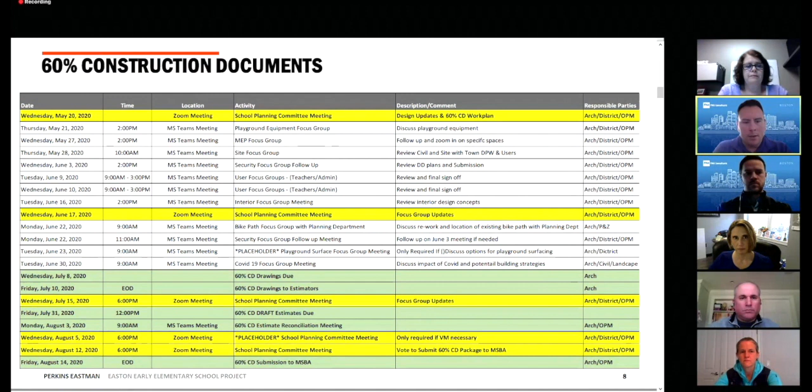So after DD, we move forward into the next design milestone, and that is 60% construction documents. Same as design development, we develop a work plan. We identify necessary focus groups where additional information is needed to support the design team and their subconsultants' development of the construction documents. At completion of 60% design, that again gets submitted to the MSBA.

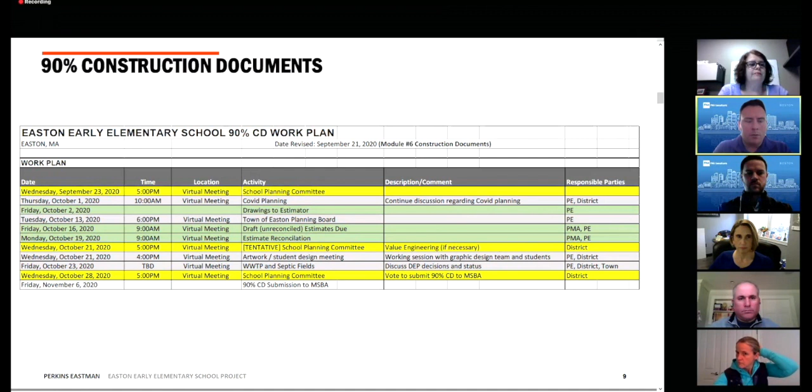The MSBA provides review comments, and then we take those review comments and we roll right into 90% construction documents. By this time, the nuts and the bolts of the building are really there, and we're just kind of fine-tuning some of the leftover design decisions that need to be made. We do submit again to the MSBA, and we perform another round of estimates and another round of value engineering on the 90% package.

This all happened last November, so that process through 90% took just about a year from the date of the local funding authorization. With the MSBA responses back on the 90%, we move forward and create the 100% bid documents, which are also submitted to the MSBA, but we do not get comments or feedback from them, as they serve at that time as the bid documents and bid package put out on the street to the subcontractors and general contractors.

Now, sorry, do you want me to go, Jane? Nope, go right ahead. All right, we're just going to do a quick design overview.

And with that, Dan Colley is going to highlight some of the sustainability features of the new building. We are targeting LEED Silver. Some of the highlights are our use of low emitting materials. We're chasing 5 categories: paints, insulation, composite woods, ceilings, and flooring, looking for EPDs, environmental product declarations, to support that these materials will be healthy and hopefully non-emitting or zero emission.

Our energy use reduction is at 36.8%, which is below the baseline of the average building, like an average school building, where performance is 36% better.

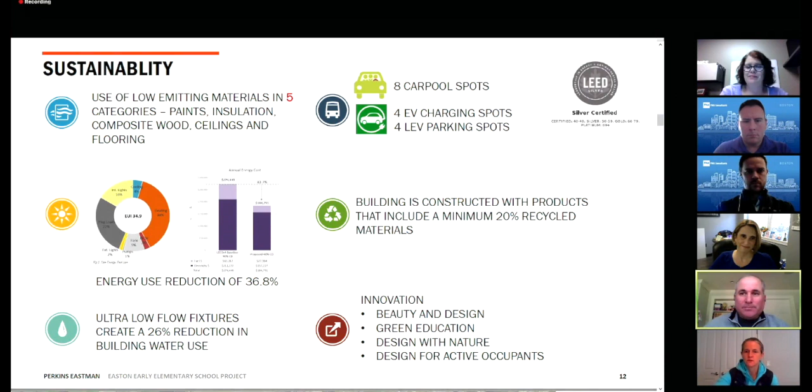So with that, I'd love to walk everyone through the site plan and give you some planning highlights about where the building will be on site, and look at some of the different components before we dive into the rendering. At the top of the screen we've got Columbus Ave, then it travels down Spooner and Lothrop toward the bottom of the page, and those are all allowing access points in or out of the campus.

You can see the existing middle school and RO on the left, and the high school is just off screen to the lower left. Mostly everyone knows the campus and is familiar with it, but in case you're not, what we are doing is connecting those 3 streets through the campus with the north-south connector road.

What that will allow us to do is mitigate some of the current traffic problems existing on the site. We heard a lot about how that currently works and how this project may be able to help and improve it, so this north-south connector becomes very important to the project.

What it does allow is access off of Columbus Ave from the north. You can travel south on that connector road, and the buses can come in from there or Spooner, and there's a bus loop just north of the building. The building is the big white outline towards the lower middle part of the screen.

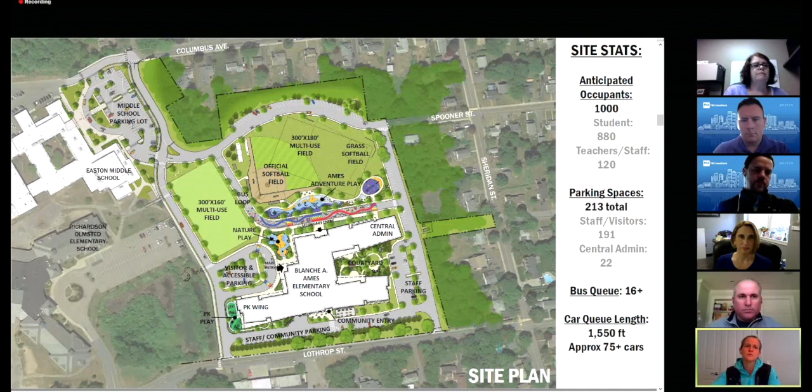The last feature on the site is the middle school parking lot upgrade that will happen as part of this project.

So we have been very fortunate to be able to afford within this project a redo of the middle school parking lot. Dawn mentioned that there's a connector road that runs out to Columbus Ave, and there are probably many people who will be listening who are familiar with how you come into the middle school off of Columbus Ave right now. Our traffic engineer felt that entry could be smoothed a little bit, and that's part of this redesign.

Also, there's a little bit of some space between the entrance to the existing middle school and the drop-off area, and a reconfiguration of that parking lot to allow individuals to access the new connector roads more easily. It actually increases the parking lot a little bit by about 3 spots, so it goes up to 86 parking spots versus the 83 that were in there previously. So it's a little bit more parking and a lot better circulation.

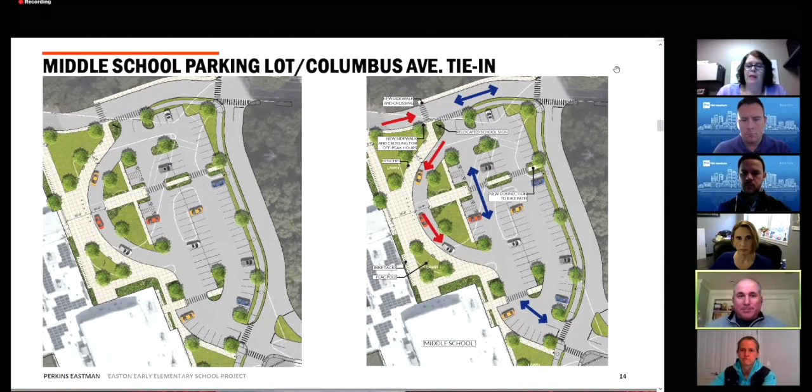Great. So with that, I'd like to walk you through some of the exterior renderings that have been done and just highlight some of the areas that I described on the site plan.

So this nature themed playground that I described, you can see here with some of the precedents and the site plan of it. There's a platform, a custom climber, and lots of wood steppers and a spinner, fully accessible and available to all students, whether it's at arrival or during recess. Plenty of fun things for the students to connect directly with nature.

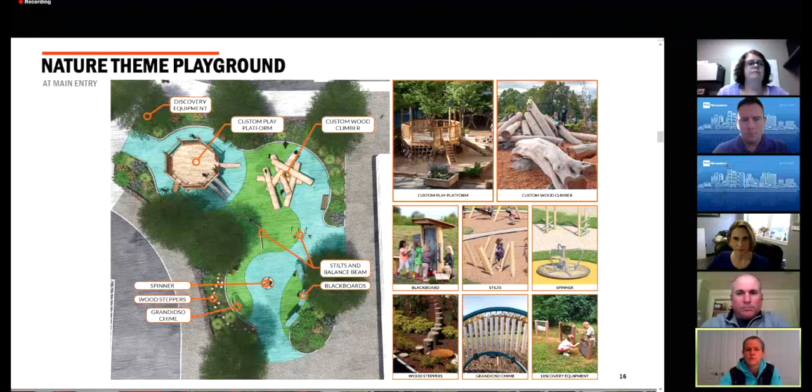And here are some of the renderings. You can see, again, these are just part of our model. As they're built, they may look a tiny bit different, but for design purposes, this is what has been planned. So this is at the main entry.

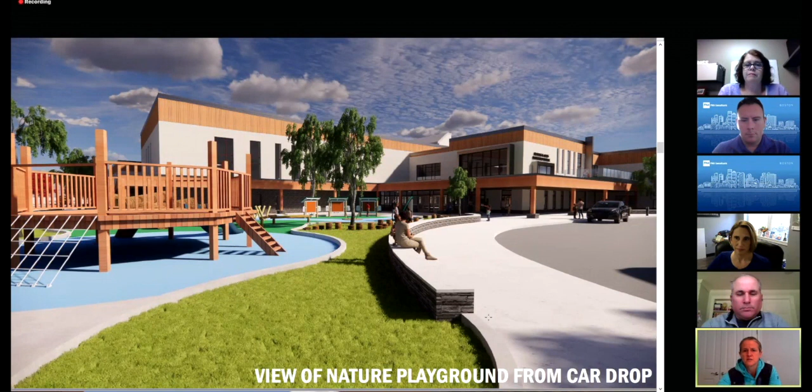This is a closer view with a seat wall. The main entry is to the right of your screen. The media center and the Discovery Terrace off of the media center is to the far right. The gym is center on the screen with this natural play area in the foreground. And the car drop is to the right of the screen.

So that's where all the cars will drop the students. The bus drop is to the left, just behind the view of the climber.

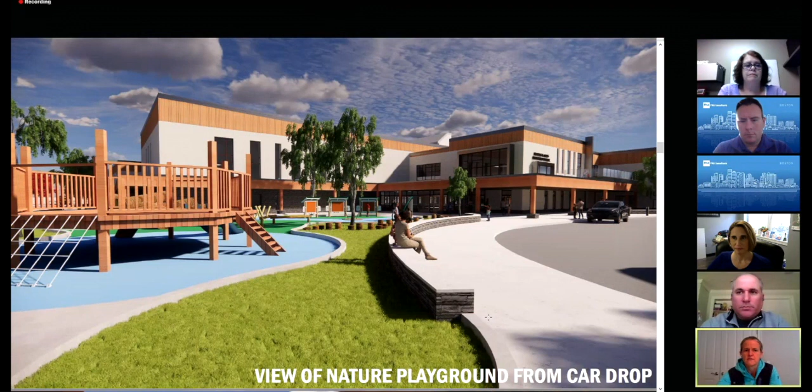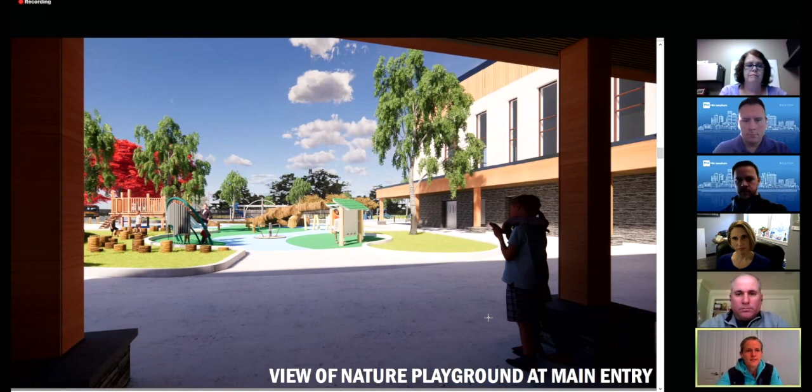This is the view out from under one of the canopies. That is intentional. The main entry wanted to be scaled and safe for the students to arrive and feel comfortable. We've got these timber canopies throughout the design that you'll see, and part of that is to provide warmth and a covering and scale the multi-story building, because these are really young learners who are arriving at one of the biggest buildings that they may regularly attend school in.

The Ames Adventure Play area is an elongated, very large play area between the main building, the gymnasium in particular, and the fields I described, the softball fields and the multipurpose fields. And this has a lot of structures.

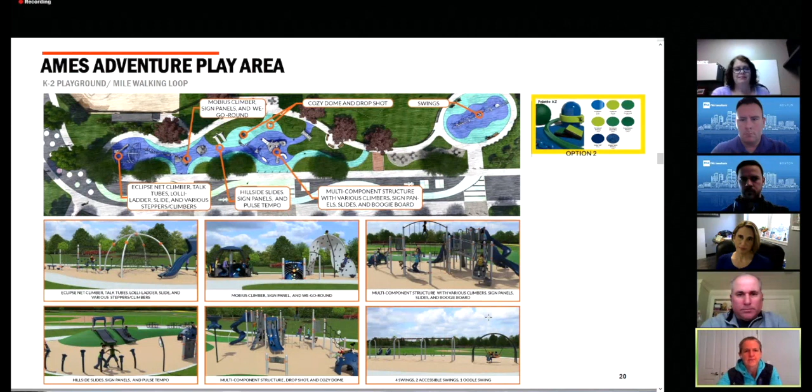We were asked for lots of swings, climbing structures, slides built into the hill. This gives you a flavor for some of what our landscape designers traversed. They've done a great job connecting to the Ames theme and the adventures, which is part of the building theme as they grow, recognizing the connection to outdoor fun. There's a hint of planets and that sort of thing that students can learn while they're also playing. And these are some renderings.

So you're looking back at the building. The gymnasium is that large structure in the top middle of the screen. You can see the bus loop that is closed off during the day, as I mentioned. There's a secondary entry just to the left of the gym where students can come directly out from the gymnasium or from the main corridor in the building. I'll show that to you in the floor plan in a moment. They can directly connect to here at any point during the day for recess or outdoor play.

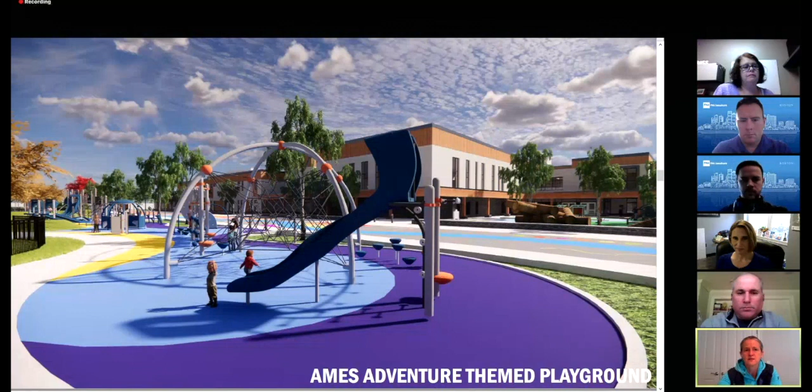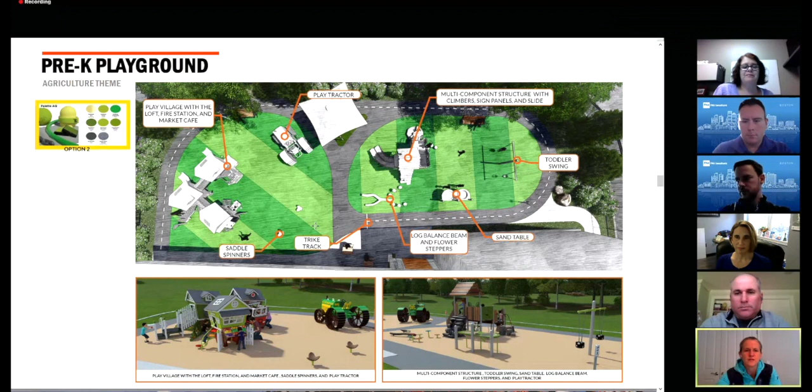Then the pre-K playground — no renderings to show, but this is a floor plan, site plan at the top. It's scaled for the youngest learners, 4- and 5-year-olds, and themed around agriculture. You can see the colored play surface that looks like a field, a tractor to climb into, and all these fun features for students to play. There's also a trike track that travels around, and an overhang to store the tricycles and riding vehicles, with stop signs and places where students can yield to other riders. It's a fun way to connect to the play area itself.

The last feature I didn't point out in the site plan, but should have, is the learning courtyard. It's nestled between the two kindergarten and grades 1 and 2 second floor wings, and I'll point it out in a moment in the floor plan. This is really an outdoor learning space.

It's both for outdoor classes and learning tied to nature, as well as an area where we're collecting some stormwater with a small wooden bridge over it. That can get tied to curriculum, and teachers can be creative about how they implement these connections. These are just some views of outdoor learning within this courtyard, and it's fenced off for security purposes so students can't just go running off into the parking lot.

Here you can see the bridge and one of the porches — we're calling these front porches — in the background. This is one of the classroom wings, two stories. At the first story, there are timber canopies that I described throughout the design, but they also serve as overhangs for protection from the elements, snow and rain, while still allowing a full class to come outside and be underneath. We've got rain chains and opportunities for students to learn in their natural element.

So this is the first floor plan. Here's the learning courtyard on the right, between the two kindergarten wings. These wings are intentionally skewed, intended to be clusters of four, recognizing that at this age students can really start to recognize 80 to 100 of their fellow students. So the classrooms of 3 or 4 are intentional in all these wings, intentionally skewed to break down these really long corridors that are a little more natural. You'll see a few renderings of those.

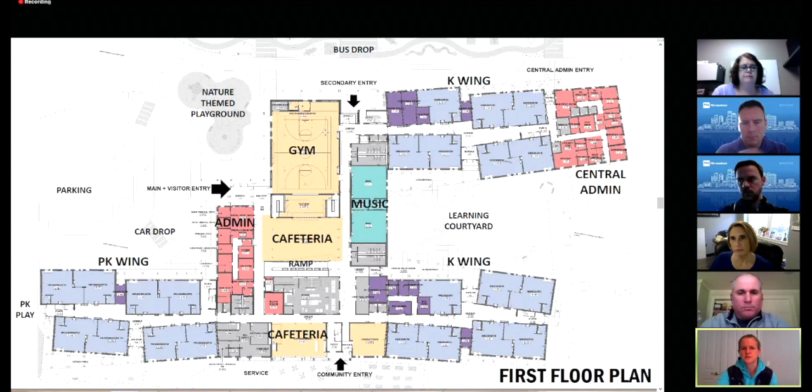Great, thank you. And that's an excellent point to bring up. The occupational and physical therapy rooms are up closest to the gymnasium at the top of the screen. There are calming rooms, sensory rooms, and also conference rooms for IEP conferences adjacent to some of the offices that Alicia mentioned. So with that, I'd like to take you into one of the corridors as an example.

Our goal from the very beginning of this project was to be specific about the design of this building for the youngest learners. And our goal is to facilitate play and to recognize that play is really the occupation of children, and that's how they learn. So a lot of what you'll see and recognize as the building gets built is some of these features that are implemented both throughout the corridors, also the ramp, which I'll get to later, but also within the classroom. So we hope to make connections to outdoors, to give interactive capabilities for teachers to work with students and allow them to learn in an interactive way, and specifically to evoke curiosity in these youngest learners.

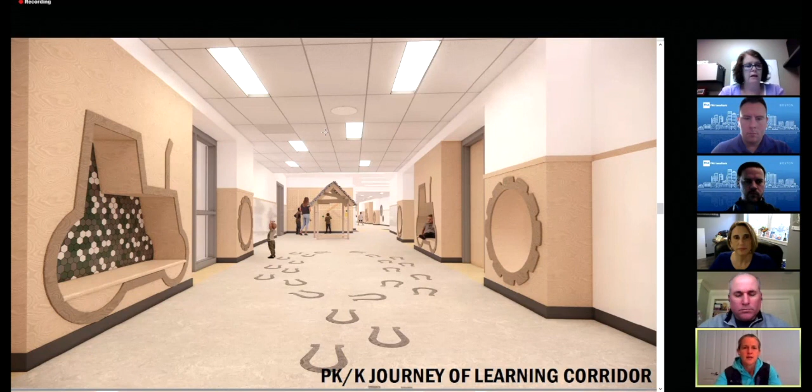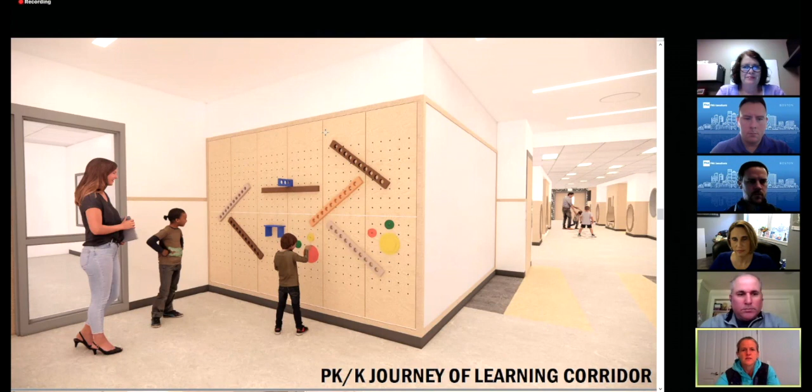So you can see benches and little areas of escape, whether it's under this little built structure. You can see here, we've got peg walls, we've got whiteboards. Students can measure things, they can draw things throughout the corridor. So really our goal is to create a learning opportunity on any surface that is available to us. In the pre-K area, we have some mirrors that students can interact with themselves. And then also in strategic areas, glass that students can interact with each other.

As Dr. Cabral mentioned, these classrooms are paired. I spoke about four of them. This is one side of that cluster, so there's a mirror image of this on the other side of the corridor. But this is a pairing of a pre-K classroom or a typical kindergarten classroom because they're about the same size. And what happens here is that we're really bringing that playful journey into the classrooms. Each of these classrooms is zoned for different types of learning, whether it's student storage, whether it's art, whether it's science and STEM, or they can manipulate things.

So each of these rooms is specifically designed to be flexible. It's got built-in cabinets and cubbies, also the toilet rooms that Dr. Cabral mentioned directly off the classrooms, but all of the furniture and interactive whiteboards and easels and that sort of thing can all be flexible within each space.

And of course, you can see the multitude of windows at the exterior at the top that have this connection to nature. We have a lower sill here, and that's intentional. It's only 1'4" off the floor, but it's because these youngest learners are not that large yet, and we want them to be able to stand and see directly out the window and make those connections to nature.

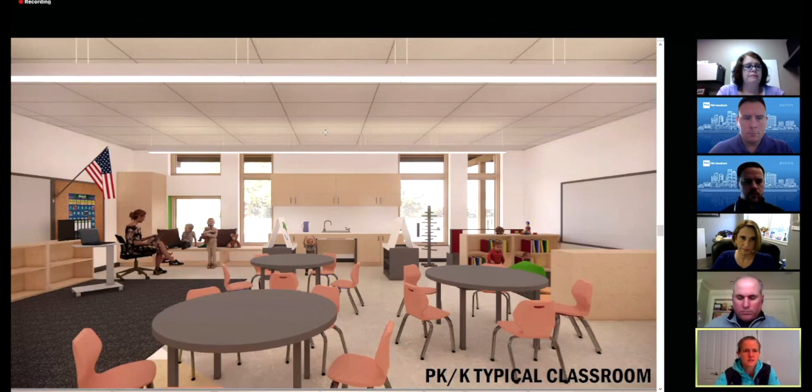And here you can see a rendering of a typical pre-K or kindergarten classroom. Again, there's a couple sinks as well as the restroom, so these students in theory have everything that they need within these classrooms. And here's another view of it with the teaching wall in the background.

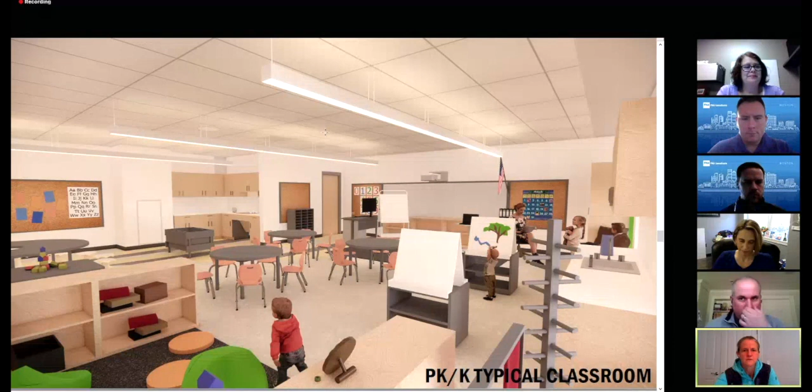So let's take you upstairs to the second floor. A similar footprint, but each of these wings now becomes a grade 1 or 2 wing. So all of these classrooms upstairs are sized for your typical grade 1 or grade 2. They're still in their clusters of 3 to 4, and they also are connected with these small group rooms that are the purple, the darker purple between the lighter pairs of classrooms.

And that's intentional, whether it's for a little bit of pullout or some specialty reading, or a little bit quieter space that the teacher needs to use, it's available to them. So each of these pairs of classrooms has that.

In the corridors, which we'll see a rendering of in a moment, there's a little bit more flexible learning. And that's intentional for encouraging discovery and interaction between students. So that can be used whether it's group work or students have a project going on, maybe there's something else going on in the classroom, and they break out into their groups. That is in a space that they can come together and collaborate within the corridor.

You can see through the middle, there are 2 art rooms over those music rooms I described. The gym and cafeteria are 2-story spaces, so you'll either be able to see over a railing or through windows into the gym. And then the media center is at the top of this ramp, which I'll get to in a moment.

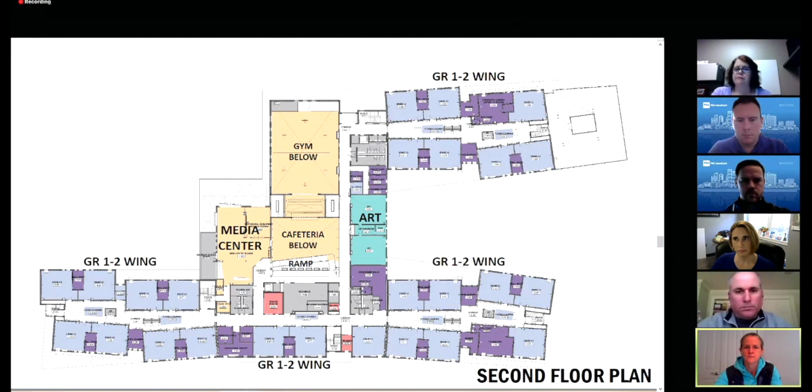So with that, I'm going to take you down a typical corridor, whether it's grade 1 or grade 2. They're mostly the same, themed and colored differently so students recognize where they are in the building. What's happening here is really a creation of collaboration spaces that allows for communicating and resolving conflicts, managing tasks, for students in their little cohort of 3 or 4 classrooms to learn to work together and use this space collaboratively.

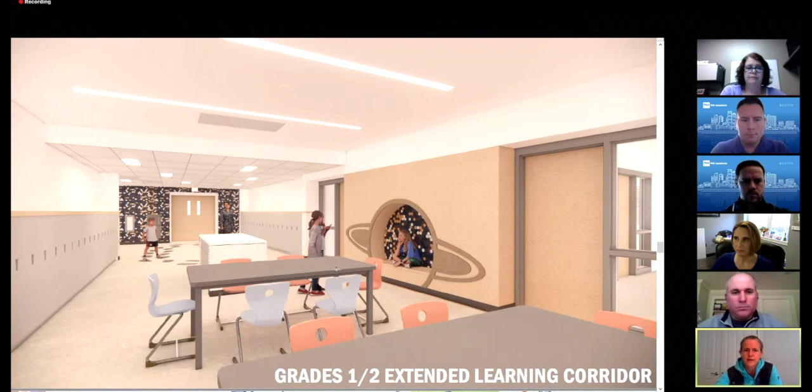So with that, I want to take a step back and talk a bit about the process and the design. Dr. Cabral mentioned the Blanche A. Ames school name and the background that was provided on her and what she meant to the community.

So through Dr. Cabral's office, we connected with a handful of very intelligent, well-spoken high school students in Easton who grew up in town and have very strong connections to the history here. They did a presentation for us on what they thought was important to tie the architecture back to Easton, and specifically to Blanche's legacy.

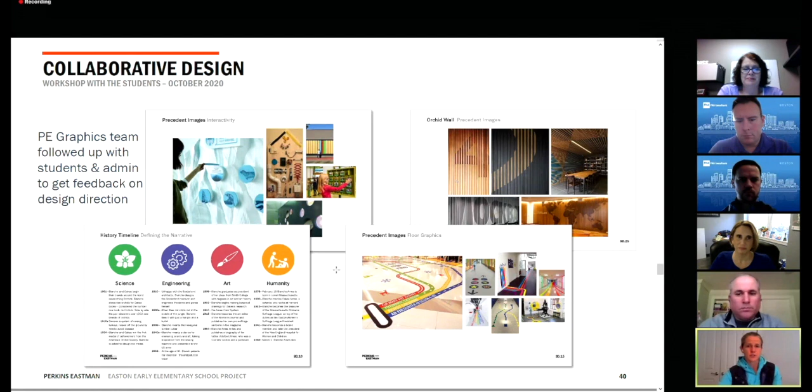And then we color coded them in a way that the youngest learners can interact with pictograms, like visuals, because not everyone at the school will be reading yet, and tie some of her most important legacy features into the architecture. So it was sort of a back and forth, and it's been great. Honestly, we have a meeting with them tonight to bring them up to speed on this.

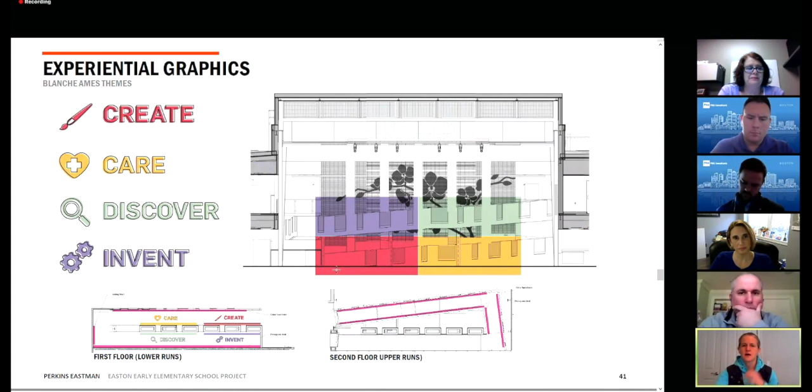But what came out of that was some experiential graphics. Specifically, the girls spoke about this ramp that takes you from the first floor up to the second, and sort of takes you to the media center. There are 4 themes that, as you traverse up or down the ramp, create, care, discover, and invent. They're color coded, as I mentioned, and each area has graphics and interactive capabilities.

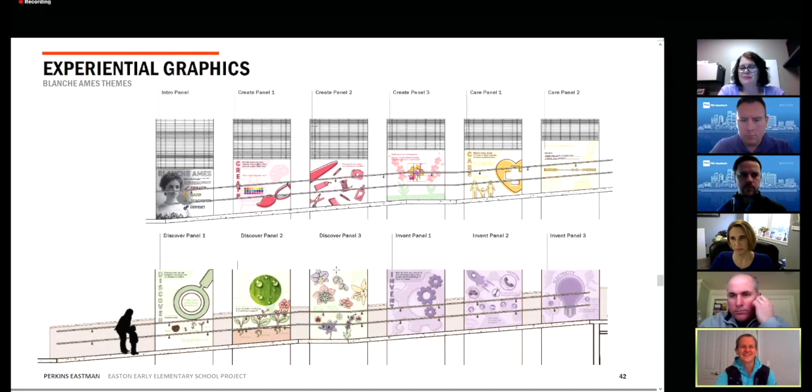So this is just a quick look, I'm not expecting anyone can read this, but these are different panels. I'll show you a rendering of what it will look like when it's built, or similar to, not exact, but about her life and legacy.

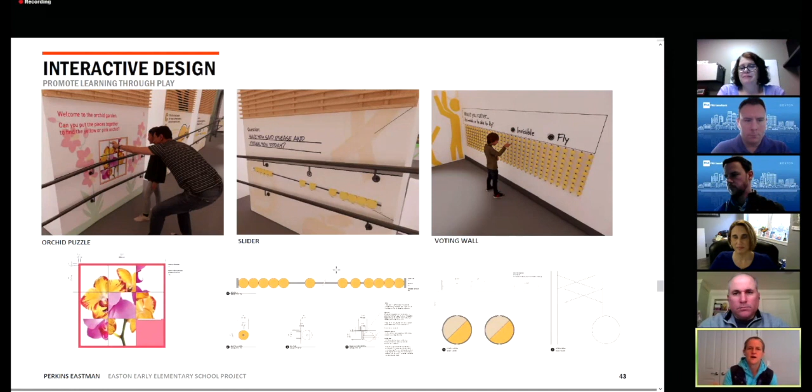Here's an example of an orchid puzzle along the ramp that students can manipulate and put into what they believe the orchid could look like. There's a slider where a question can be written, like 'Have you said please and thank you today?' People can say yes or no. They can vote on 'Would you rather be invisible or be able to fly?' Students can flip these little interactive pieces at the landing of the ramp to vote on, and an adult can change the question every once in a while.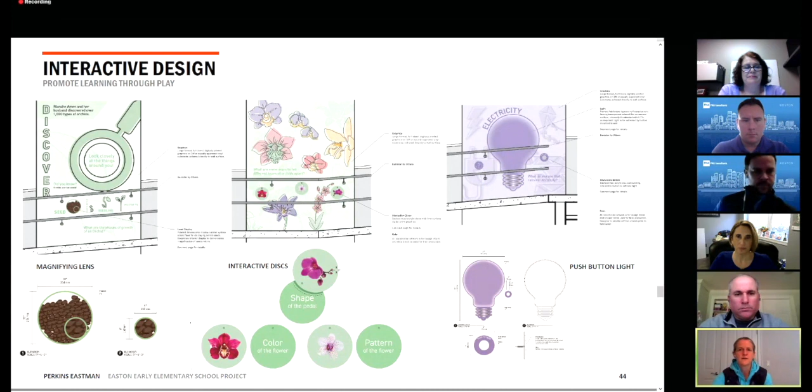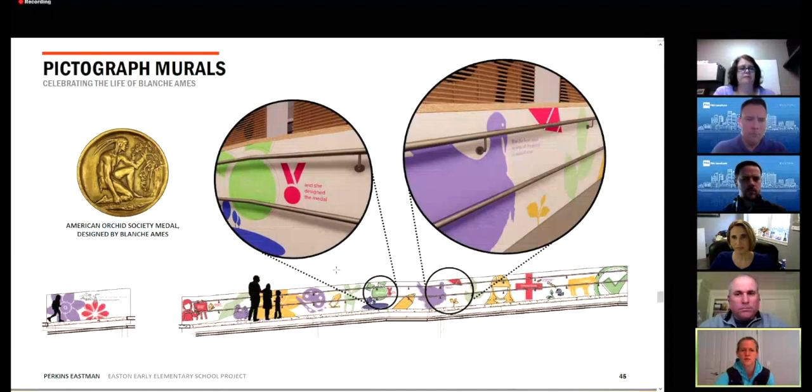These panels also have interactiveness. There's a magnifying lens or interactive discs that slide up or down and speak to the orchid, electricity, and light bulb. I'm not going to go through everything, but this starts to give you a flavor of what the graphics on one side and the interactive and information pieces on the other side will be as you travel up this 2-story ramp. And then this is what it will look like from the cafeteria.

We've got this wood wall with an orchid, which is part of what Blanche is known and famous for. And throughout the journey of the ramp, because we spoke about the journey of learning, students can learn about Blanche, learn about her legacy, and also interact with these features that make the journey up and down this ramp a lot more interesting than just walking.

I just wanted to note, part of the designers really listening to the user groups and all of the functions that we felt were necessary for this really important project.

You can see that from the inside of the ramp, it's very interactive. It looks like a children's museum. It's engaging, it's got wonderful colors, and it's all at the sight lines of our littlest learners. But from the outside, as a community space, it's got a very classic look, very muted colors, natural timber and natural sunlight, so community members can make full use of the space and don't necessarily feel like they're in a small children's space.

So it's got that double function, getting as much bang for the taxpayer commitment as possible. It can be used for many years to come with any possible function you can imagine for a space of this size. We're very thankful for them hearing us and hearing those very tall orders that we gave them, and being able to incorporate all of that into the design.

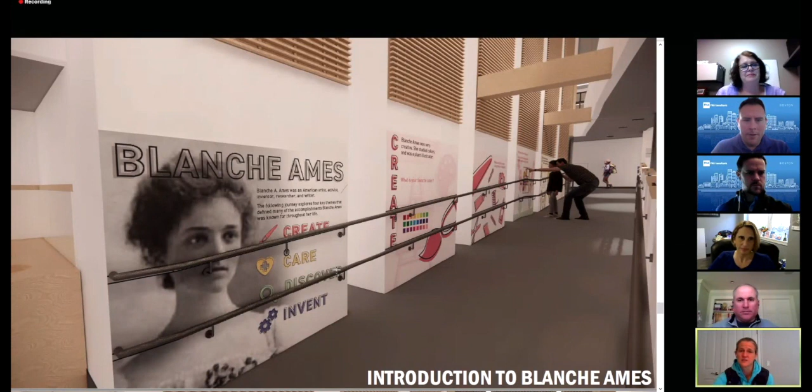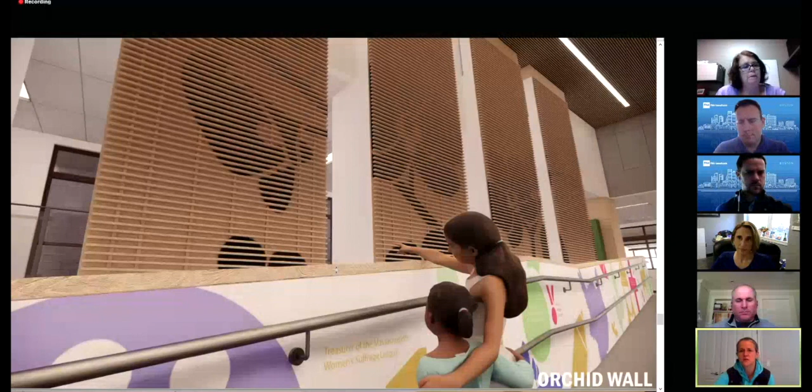I'm just walking you through what some of this looks like as you go up and down the ramp, and you can see the wood feature of the orchid wall. This is from above. We've got these little seat windows, you can see the green square, there's a student sitting in there, that's looking towards the media center. And on the right, looking down towards the cafeteria, and that's the stage that you see on the right.

So with that, we're going to transfer to process again, but that's the high level design where we've come to get us to the end of our construction documents phase. One of the things I want to comment on is it's very apparent, I think, to anybody seeing these, how carefully all of the elements of this building have been curated, even in terms of the ramp and thinking about what we need for our youngest learners.

Some of it is very obvious, I think this is very obvious. But the other piece I want to make people aware of is there's a lot of things that have happened behind the scenes during the design process that have also been really carefully thought out in terms of what kind of flooring materials we're using to ensure those elements are durable and maintainable, and that input has been gotten.

We've worked with our facilities folks on all of that. It's what's the access in and out of the building, and the relationship of nursing spaces to student spaces. There has been as much thought to the elements of this building that might not be so obvious and apparent as there has been to the elements like this that kind of are staring you in the face and make us all so excited.

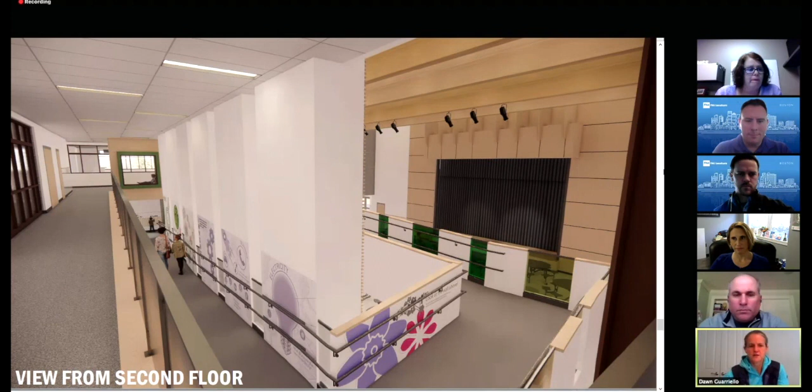Great, thank you. I think we're going to turn it back over to Chad with PMA to finish off the process for us. Thank you, Dawn. That's very exciting and certainly a tough act to follow. We're excited to bring all of that to life over the next year and a half. Really, it will be a tremendous building.

All right, back to the process stuff. Real quickly, pre-qualification under Massachusetts General Law, Chapter 149. It's a two-step process. Step one is pre-qualification of interested subcontractors, filed sub-bidders, and general contractors. We posted that last year and received 128 applications from interested subcontractors and general bidders for this project. Really a tremendous response. I think market timing here was impeccable. So now we have those packages in hand. The district is responsible for assembling a pre-qualification committee. Under the statute, there are 4 members on that committee: one from the design team, one from the project management team, and two representatives from the awarding authority. With that team of four people, they had the arduous task of going through each of the 128 qualification packages and scoring each contractor on a series of statutory questions and categories, totaling up the points to determine whether or not they were pre-qualified bidders.

Jump to the next slide. So timing of all this started back in October of 2020. We had responses come in November 11, 2020, and those were reviewed right through the Thanksgiving holiday, and notice to pre-qualified firms was issued. Out of the 128, 8 of them were general contractors, and the pre-qualification committee met in early December 2020. Those firms that were pre-qualified were invited to bid on the project when the bid documents were published early the following year.